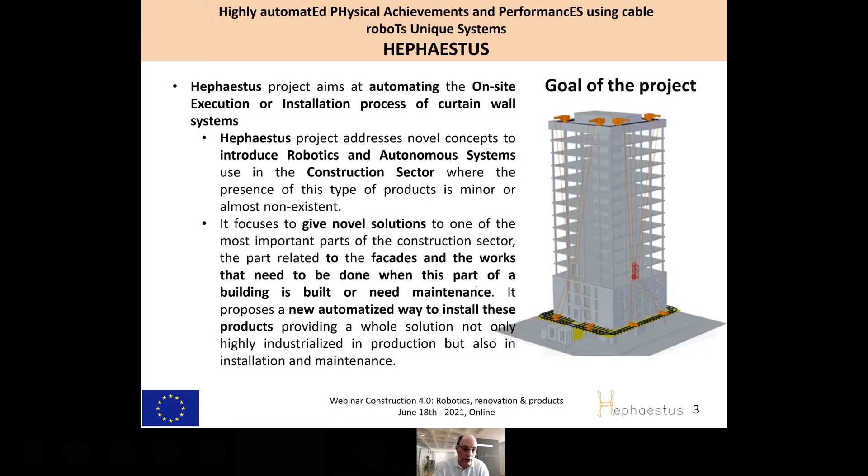And also, as our team is expert in the field of facades, what we think is, can we try to see what can be done if we install a facade using a robotic system? And this is the starting point of the project. So what we propose is to use a cable robot, a cable-driven robot. You are going to see in the next slides what I am talking about.

It is because at the end we want to focus on site. So this is not something to be done in the factory. It's going to be done in the building, where we are going to have all the problems. So the thing that we have with the cable-driven robot is that we can move elements across big environments. So we are not limited to a specific place. In fact, the results that we obtained show that we can move elements in a matrix of 100 by 100 meters.

So the components that we have in the system are a cable-driven robot that we are going to use to move across the space, and what we call a modular end effector that is going to be the robotic element that performs the different activities that have to be done in order to install a facade. And what we want to mention is also that we have a system that is multifunctional, so we are going to perform the different activities that have to be performed once you want to install a facade.

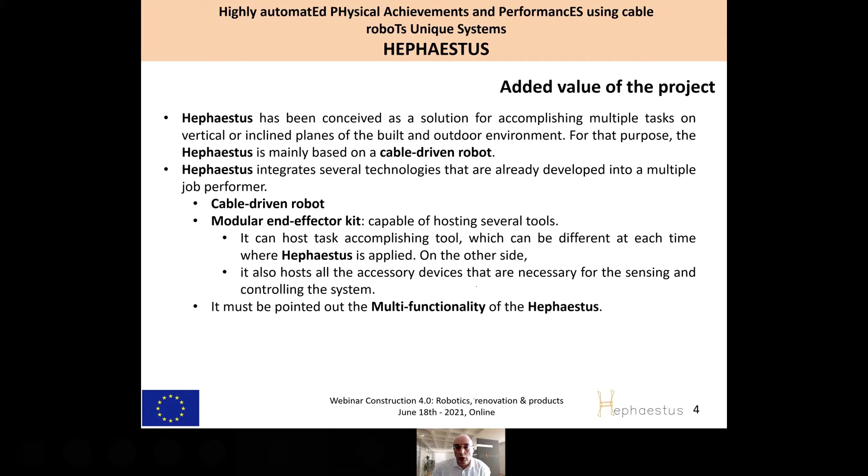So what we are going to do is to install these prefabricated panels of the curtain walls. We can replace damaged elements. So at the end, once the building is finished, the system could remain in the building to make replacements or to do the maintenance. So this is something that can be done.

What we want is to have a system that is easy to move, and have compatibility with other systems that we can have in the building, like gondolas, scaffoldings, all typical platforms that we have in construction. So these compatibility issues have been checked during the project. And also what we want is, because of the cable, to have a system with high versatility and a very broad reachability, and also to be able to move across complex geometries.

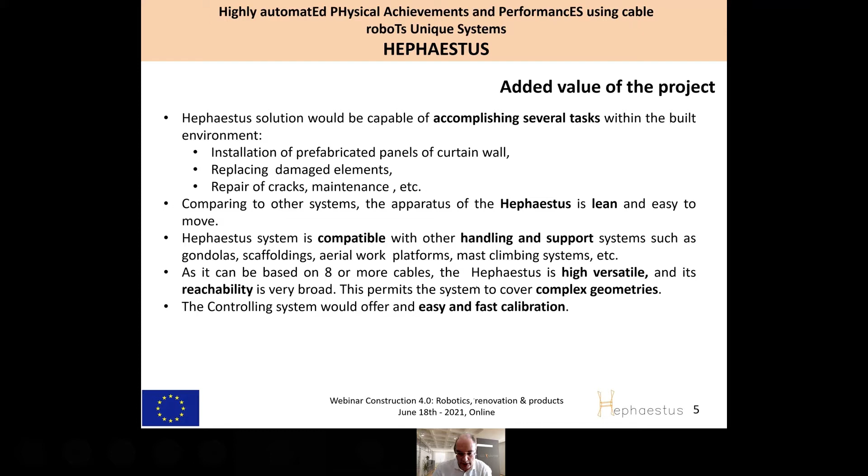Also, a control system has been developed, and what we need is an easy and fast calibration because we are going to change between different parts of the building each time. So, as I mentioned, the project is financed by the European Commission. It's a project of 42 months. At the end, it's 48 because of COVID, and it ended in December of last year.

We have 9 partners, 3 SMEs: Vicinay, which is a company that manufactures cranes, R2M that helps us in the business and dissemination issues, and NLINK, which is a Norwegian company that develops robotic solutions for different works in construction. Also, we have two large companies, Acciona, a large Spanish construction company that builds different kinds of buildings, and Focchi, an Italian company that installs facades.

And also we have four research centers, Fraunhofer, Tecnalia, LIRMM, and the Technical University of Munich that help in all the issues related to the specific research. So what we built with this consortium is the entire value chain of construction and robotics in order to be able to manufacture, or at the end check if the system that we thought of initially was able to be done.

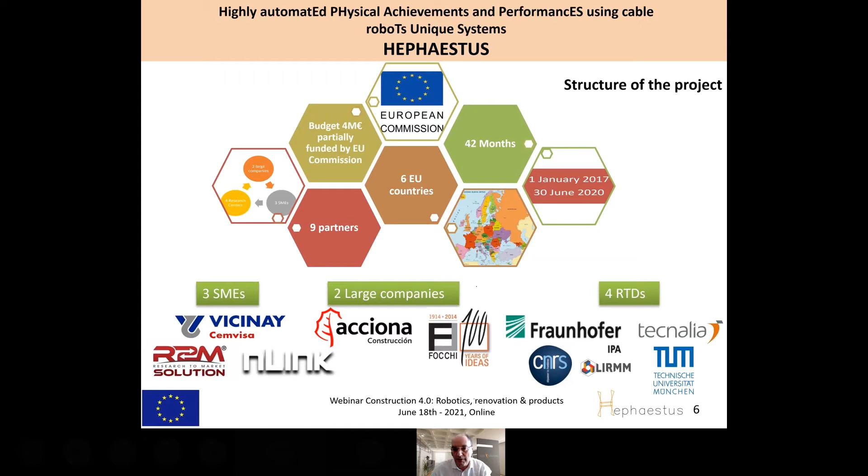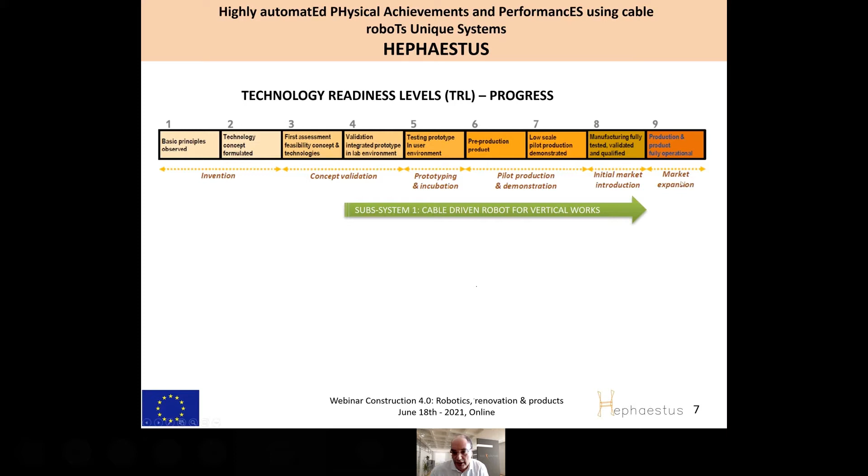Related to the progress of the project, related to the technology readiness level, the cable robot started in a validated lab environment, and at the end we reach the building, the manufacturability of the full equipment. The other systems, the end effector and the controlling system, started in the same point, and we reach a little lower, but more or less pilot production is demonstrated, as you are going to see in the next slides.

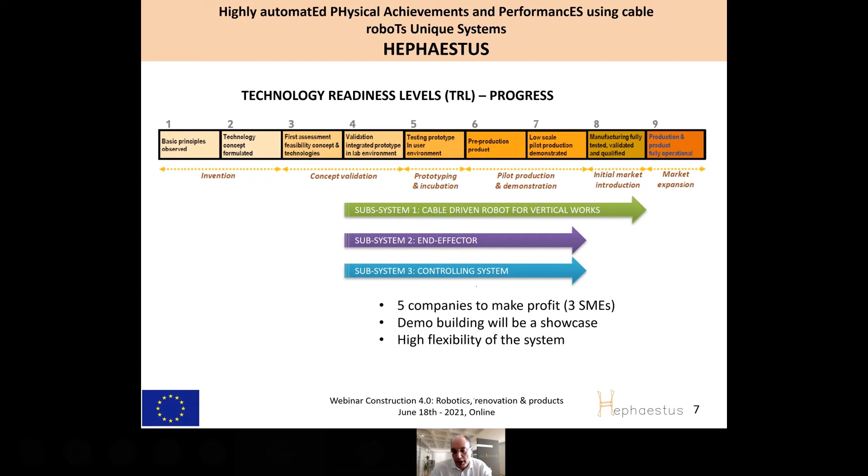And we have 5 companies to make profit. We are going to have one demo building in order to check that everything works properly, and one of the main objectives at the beginning of the project is the high flexibility of the system. So this is the work that we are performing in the project. It started with the specification, then the design of the system, the demonstration at laboratory level and at virtual level, and also, as the companies want to make profit, the business analysis in order to see how we can include this system in the market.

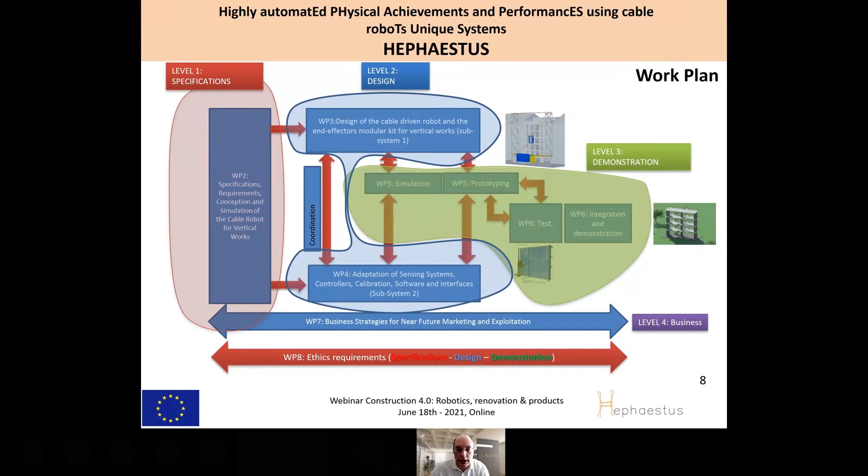And also we have the platform, which is the robot that moves across the space and that hosts the different technologies that we use to install the facades. Inside this platform, we have the 2 modular end effectors that we have in the project. And obviously, we have different sensing and control devices because we need a high level of accuracy, around 1-2 millimeters, in order to be able to install these facades, and take into account that we are talking of a demo of 12 by 12 meters and the possibility of constructing a building completely.

So one of the main issues that we have is the accuracy of the entire system, as we are moving big weights. Take into account that the platform weighs around 300-400 kilograms, and each of the modules weighs more or less the same, 300-400 kilograms. So we are moving this type of loads.

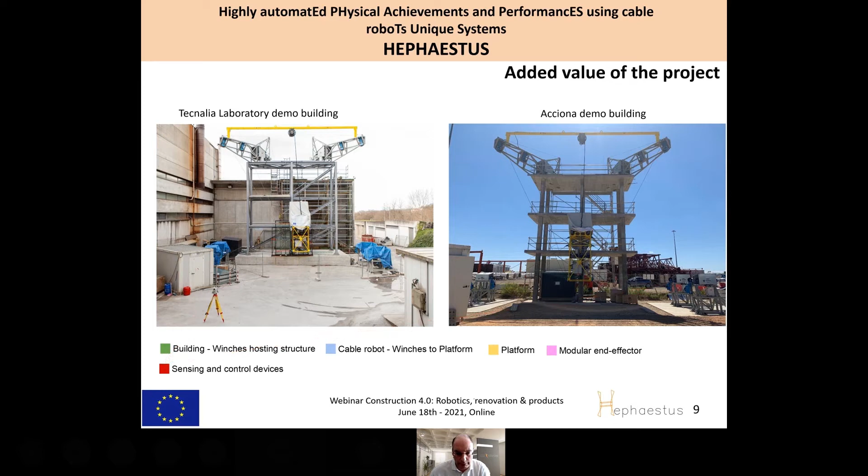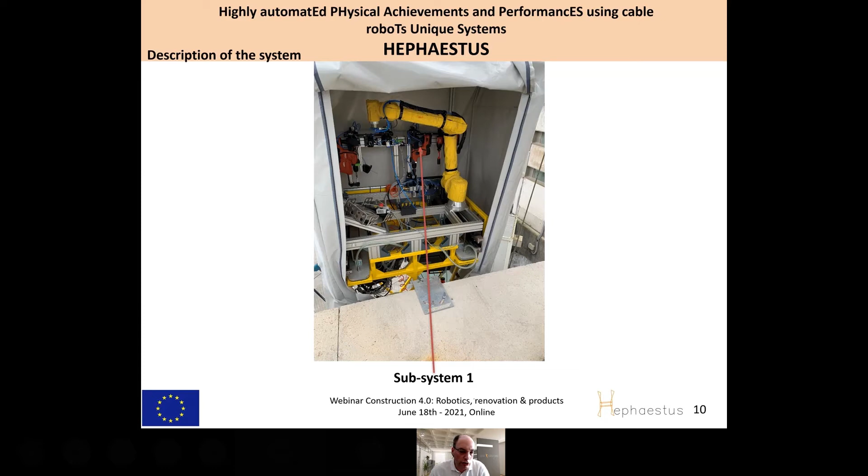And also, you can see here one of the modules that we move in the Tecnalia lab. It is a module 4 meters high, 1.5 meters wide. So we have here the module itself, the vacuum system, the equipment to make the vacuum, and the control system, because everything is controlled by software.

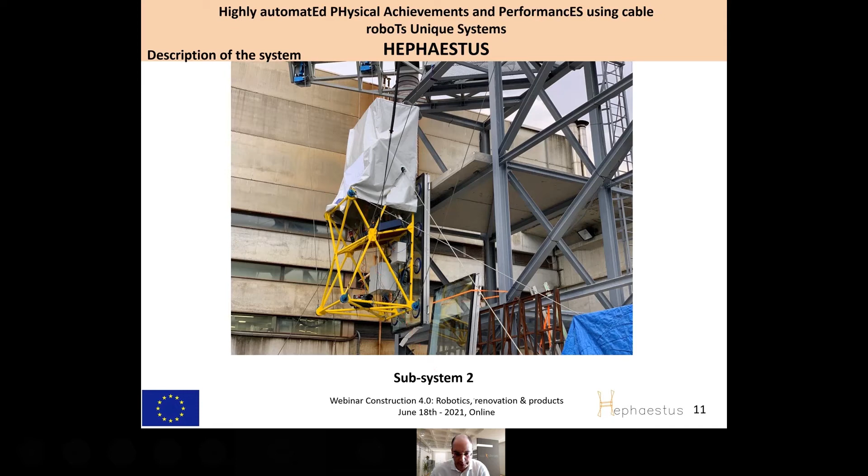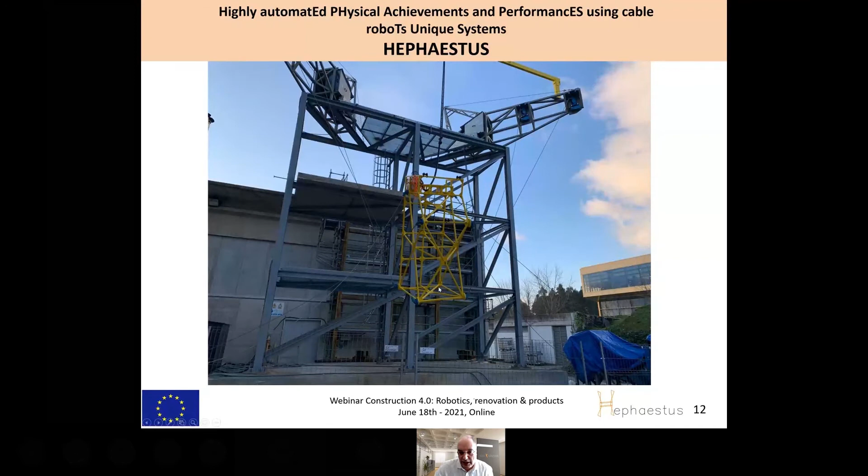And here, as we don't want to always say the good things about this project, this is something that happens if you fail with the control. If you can see here, the cables are not in tension. This structure, as I mentioned before, is 400 kilograms, and we had a problem with one of the controllers, and we lost the tension, and it provoked a rotation of the platform. And okay, we had luck, and nothing more happened.

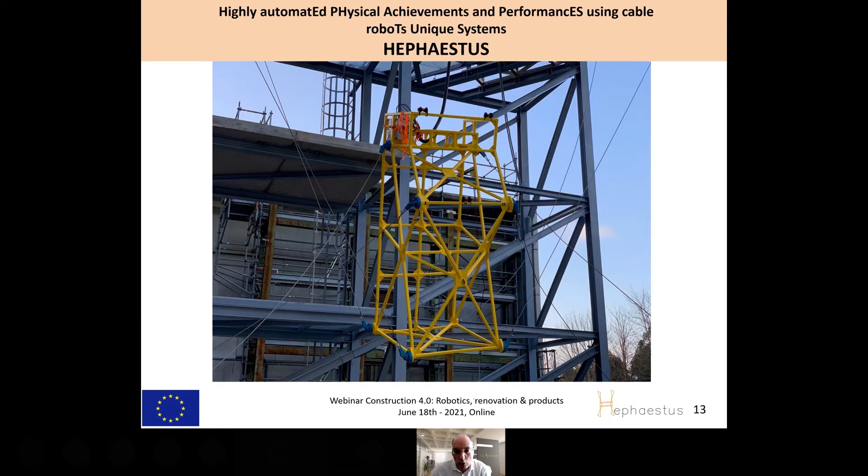But this is the type of thing that happens when you do research, and you are moving big loads in a big environment. So safety issues are quite important, and this is something that could happen when you are doing this type of research. And I'm going to show you a video with the results, and I'm going to comment.

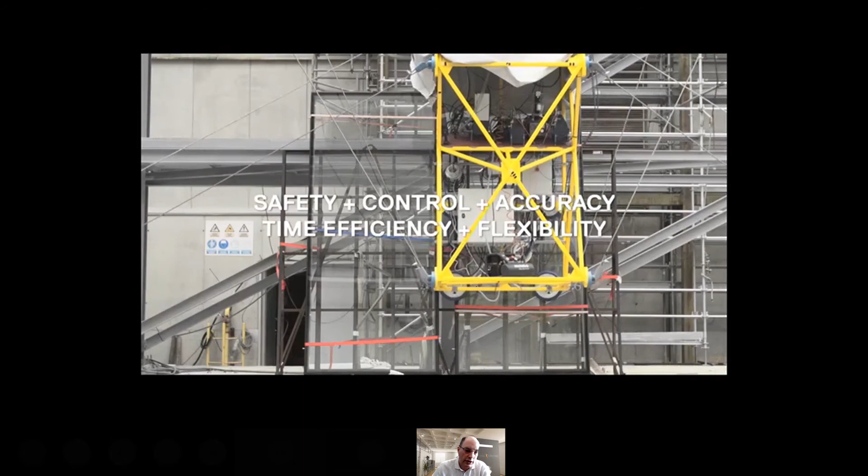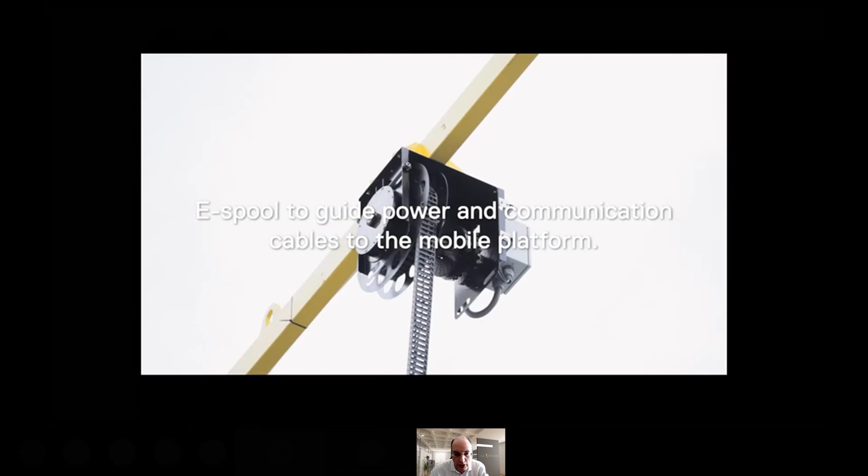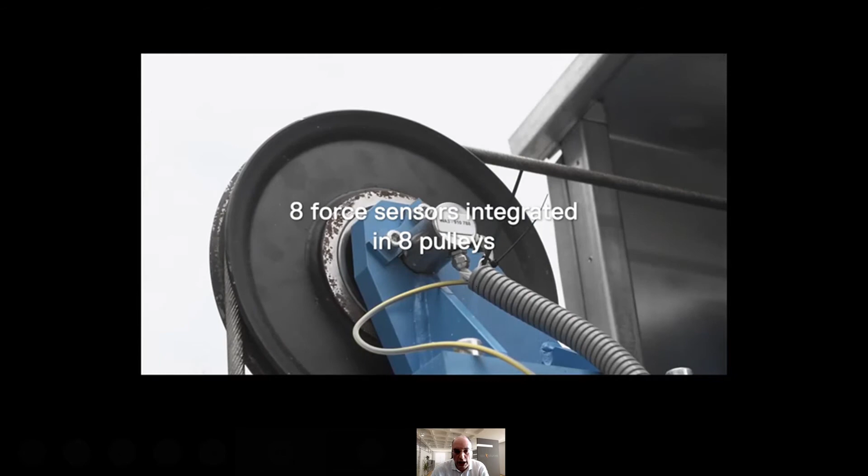So this is the final demo. You can see how the platform can move. First, the activities that we have at Tecnalia. So which are the components, as I mentioned. This is the cable robot that can be moved across the entire space. We have some elements to control the system and to connect to the software, the winches, the routing elements that we use to move the cables, and the sensors on these cables in order to check the tensions, which are a quite important element we need to know.

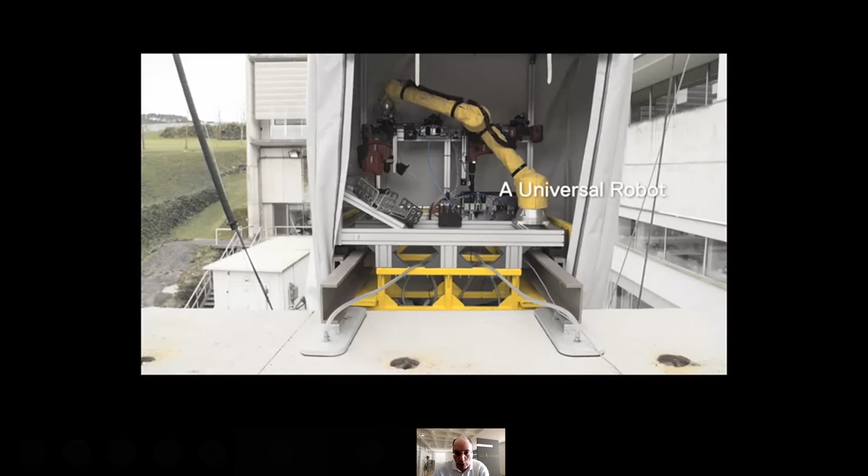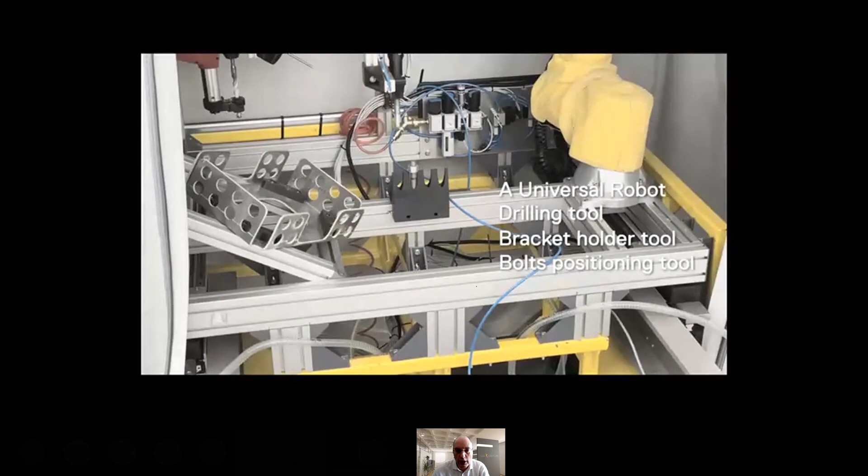And here you can see a brief overview of how we install one of these anchorages. So we come to the slab, we make the holes, we collect the anchorage, we put the anchorage, we collect the bolts, and we screw the bolts. This is something that is done automatically by the system. So we have a BIM model of the building.

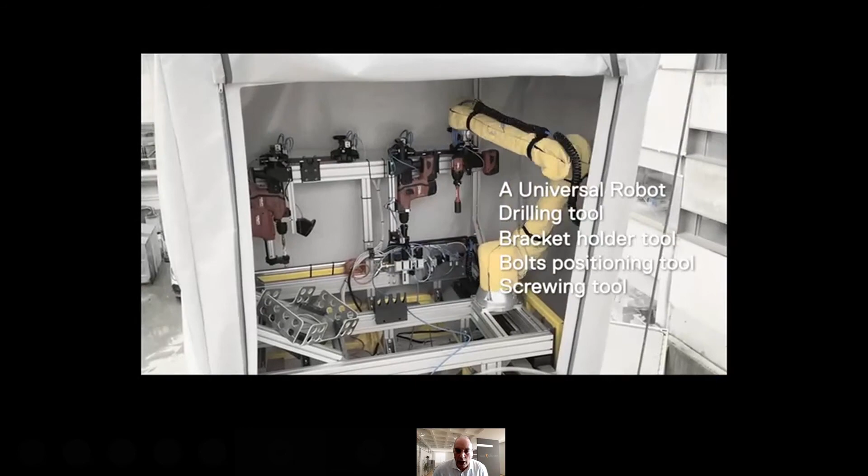The system knows where it has to install the anchorage and then installs them. Then it can collect the curtain wall automatically with these suction cups. It detects where the curtain wall is. Okay, we have people controlling that everything works properly.

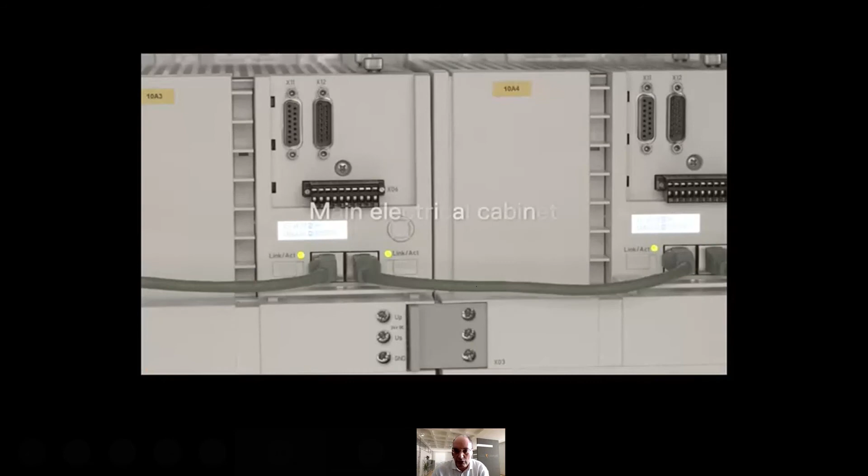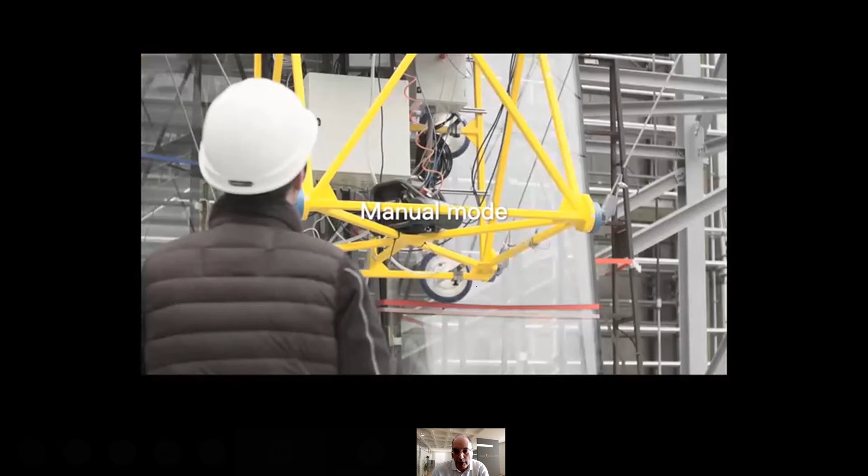We have electrical components. The control system is based on Beckhoff, and we have an interface and a manual mode if something happens. We also have a total station in order to increase the accuracy of the system. And now we are going to see the final work as we have done in Acciona demo facilities. The day of the video was quite foggy, but okay, I think that you are going to be able to see the different systems.

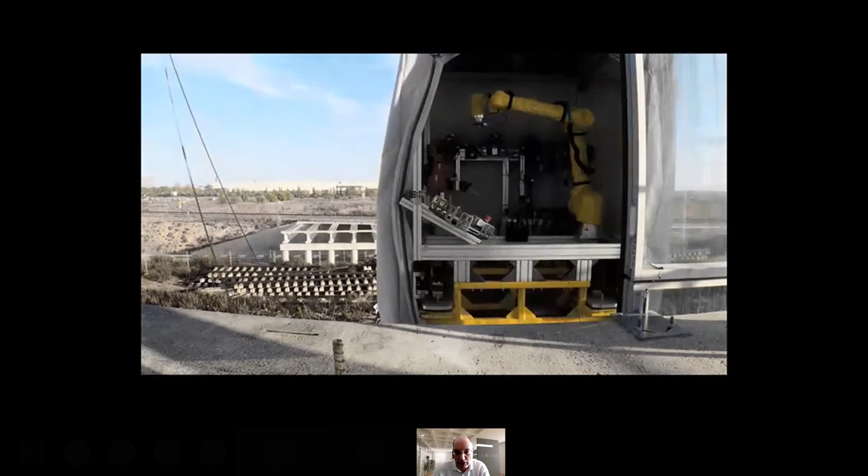And here we see the complete process of installing a bracket. So the robot comes to the place where it's going to install the anchorage and makes the holes. You can see that we are talking about concrete. It cleans the dust, puts the anchorage, collects the bolts, puts the bolts in place and screws the bolts. Once this is done, it collects the tool, leaves, and finishes.

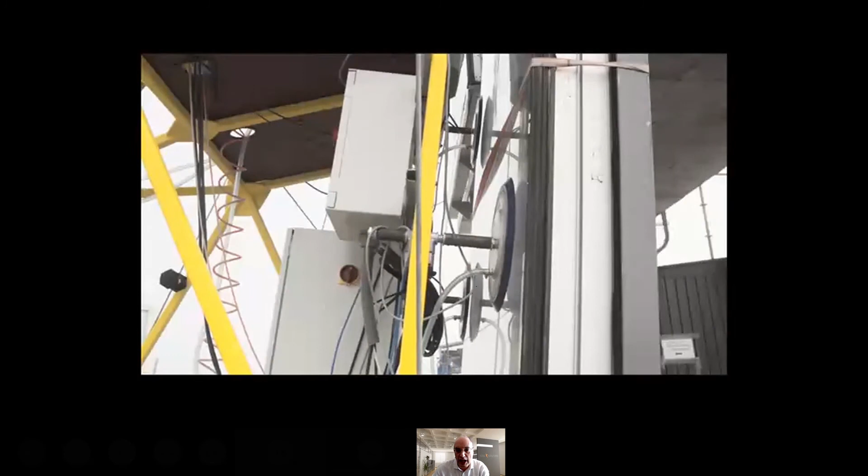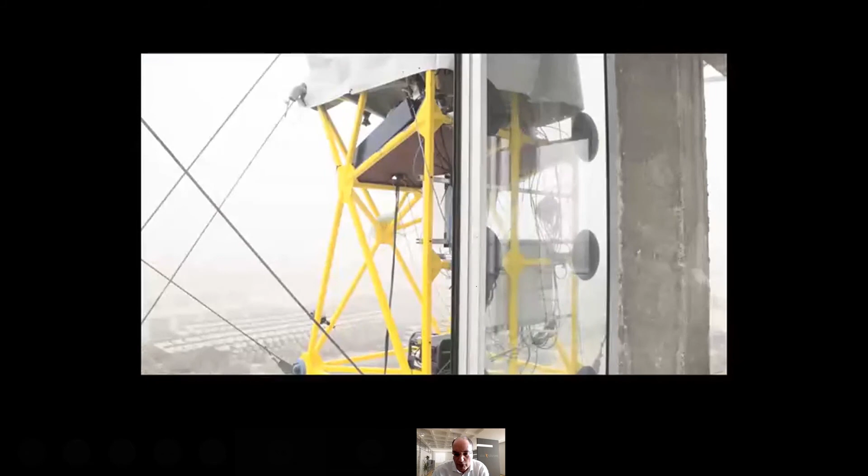So this is something that we need to do many times on the slab, and then the next activity is to collect the curtain wall. So we use the vacuum system, we move the curtain wall to the position defined by the BIM model. And as you can see here, we need to install this curtain wall with this type of anchorage in these elements that we have. And for this type of facade, a glass facade, we need to perform this activity many times.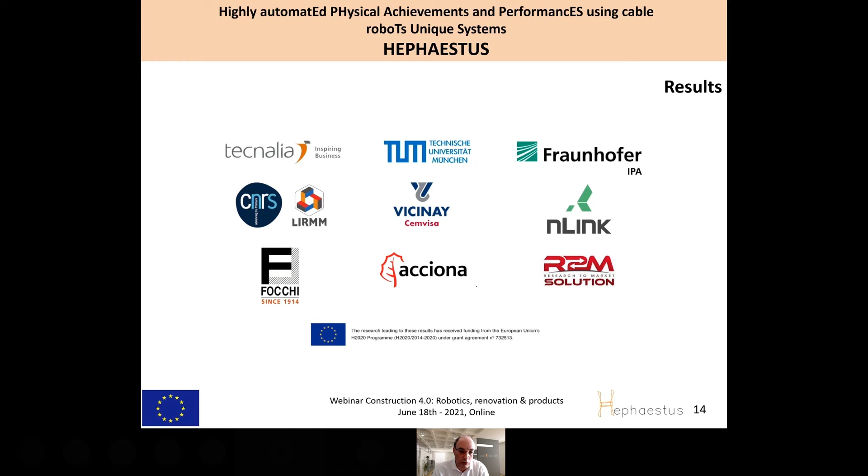All this information is included in the system of the project. And okay, we can do it with only 2 persons controlling that everything is okay. One in the control room that we have, and the other one close to the demo, close to the final position, in order to check that everything works properly.

So to finish with the conclusion, what we obtained in this project. We validated the possibility of using robotics in the construction sector to install facades. This is something that is proved by the project. And which is the added value? Because, okay, we cannot use robotics just because it is interesting. We are going to use it because it changed something, it improved something. So we improved the time of installing facades. We reduced the time of installation by 50%. And also we increased the quality of the installation.

One good thing about robotics is that they perform the activity every time in the same way. So you don't have problems of repeatability, and this type of system needs repeatability. So if you perform the activity well one time, almost all the times it's going to be well done.

Safety. Related to construction, this is something quite important. The system increases the safety of the workers because you don't need to be close to the edge of the slab. You can be in a control room, you can be on the floor some meters away, so you don't have any problem because of a height of the system, which sometimes happens. So this is something important again.

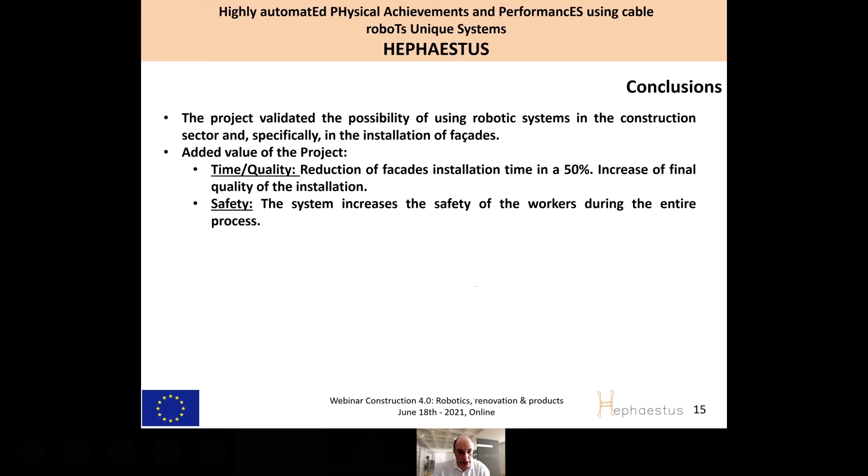And related to the cost. The cost of the system is the same as some of the elements that we have in buildings like cranes or gondolas that are used for cleaning or maintenance. So you can have this system at the same value as other elements in the building. And this one has more flexibility because it can be used during construction, but also during maintenance or the life of the building.

So which are the next steps? Robots need to increase flexibility. We need to be able to change or adapt to new conditions. And this needs other tools like artificial intelligence or other elements. We need to improve the perception of the environment. The robot needs to know quite well where it is and what happens in the surroundings, and this is something that we found has to be improved.

And also, as this is an ongoing work, we are going to include in this system additional tools for cleaning, maintenance, painting, whatever can be needed. And to finish, it is also important to apply this to renovation, as this is one of the main issues that we have in Europe at this moment.

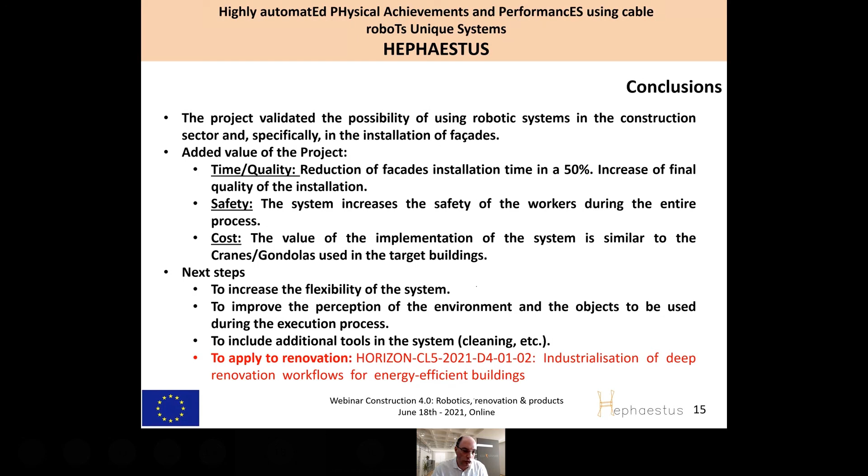The construction sector needs to face new construction, but also renovation, which has more problems than new construction. This project that I explained is focused on new construction, and we are starting a new project in Horizon Europe in order to apply the system that we have shown you to the renovation of facades. This is an ongoing process. And more or less, this is all from my side.